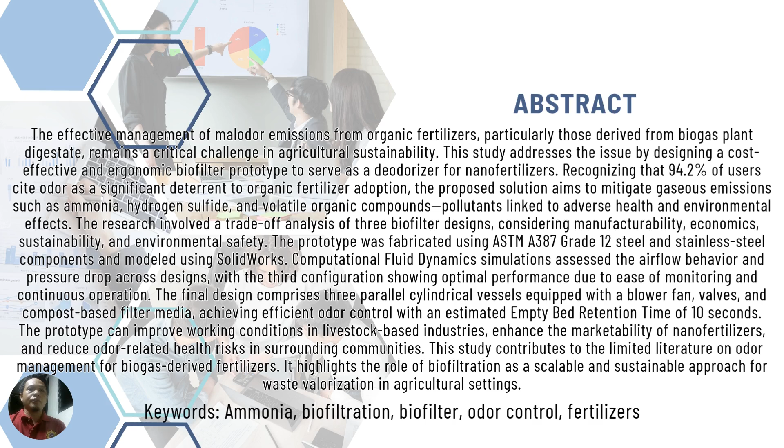With an empty bed retention time of 10 seconds, the system effectively controls odor, improves workplace conditions in livestock industries, and enhances nanofertilizer acceptance. The research advances scalable, sustainable odor control solutions in agricultural waste management.

In the Philippines, converting animal and plant waste into organic fertilizers is a sustainable and affordable agricultural method. However, its widespread adoption is hindered by strong odor, especially in urban or densely populated areas. Studies have shown that odor is the main complaint of users, caused by compounds like ammonia, hydrogen sulfide, and volatile fatty acids, which are released during composting and nanofertilizer production.

Nanofertilizers, especially those made from biogas digestate, emit more odor during mechanical and chemical processes. These emissions not only cause discomfort but also pose environmental and health risks. Solutions such as activated carbon, aeration, microbial additives, and advanced systems like biofilters are being explored. Biofiltration, a cost-effective and low-toxic method, stands out as a biological solution for odor reduction.

Despite its promise, there is limited research, especially on biofiltration for nanofertilizer odors. This study aims to fill that gap by designing and evaluating a full-scale biofilter prototype. It will include computational simulations and trade-off analysis to optimize efficiency, cost, and sustainability. This initiative supports environmental goals, public health, and innovations in agricultural waste management.

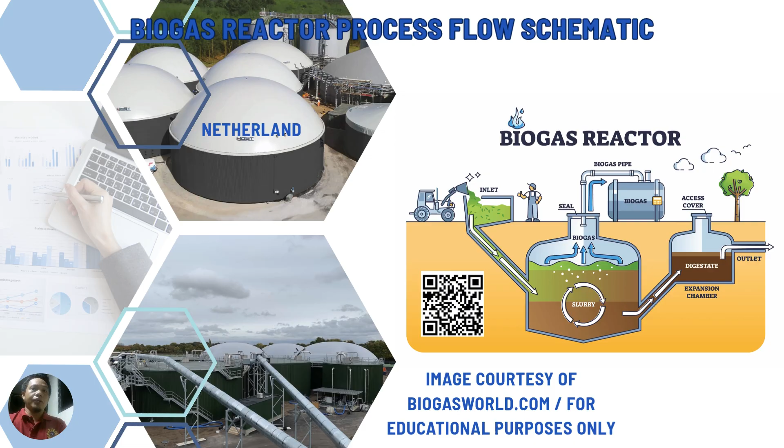The anaerobic digestion process in a biogas digester is a biological treatment method where organic waste materials like livestock manure, food waste, and plant residues are broken down by microorganisms in an oxygen-free environment to produce biogas and digestate.

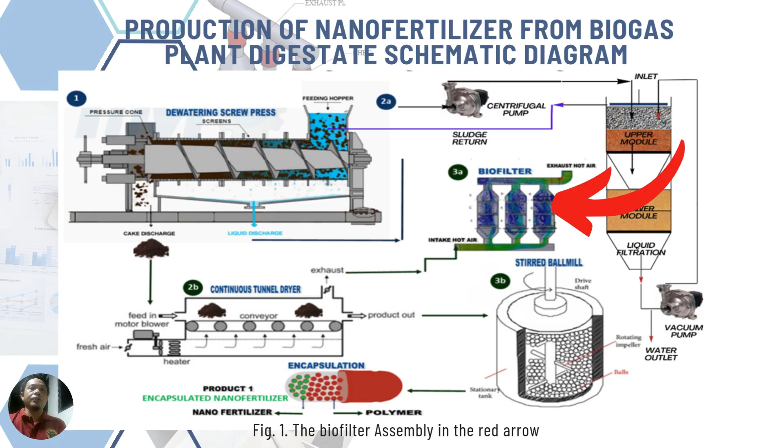In modern waste and water treatment systems, three core technologies play crucial roles in purification and material refinement: the dewatering screw press, the liquid filtration system, and the continuous tunnel dryer. Each of these systems has distinct functions but collectively they support the transformation of organic waste into manageable, reusable, and environmentally safe output.

The development of a biofilter system begins with the utilization of animal manure as the primary input material. This organic waste, often produced in large quantities in agricultural settings, serves as a resource for creating or enhancing the filtration media used in the biofilter.

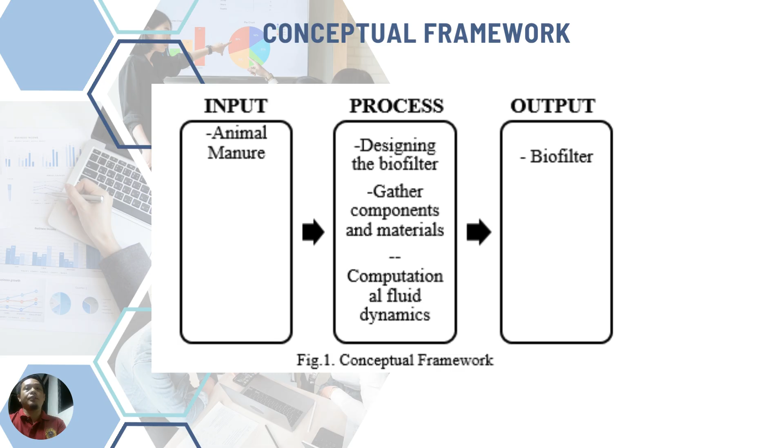This study developed a prototype aimed at reducing odors from animal manure, particularly from biogas digestate. The design features a turbulent airflow with consistent velocity simulation results despite varying pressure. One of its strengths is easy maintenance and monitoring.

Key design aspects include reduced empty bed contact time, leading to the use of smaller media, which increases air velocity but also causes a drop in volume and pressure. The system must maintain a pressure drop below 62 Pascal to ensure proper fan efficiency. Thus, build-up, media settling and material degradation can increase pressure resistance over time.

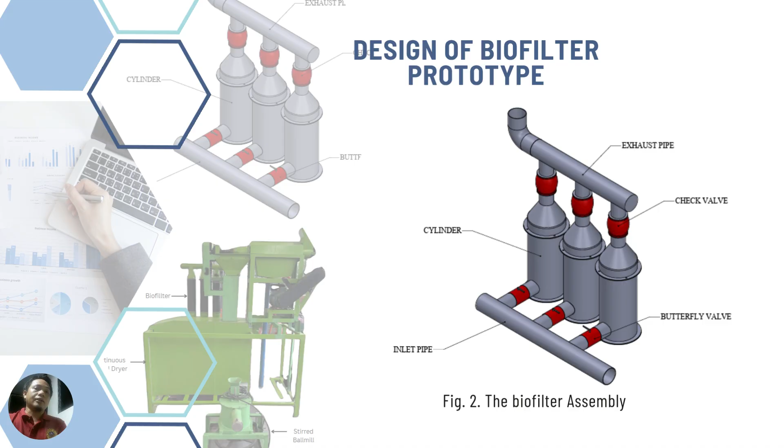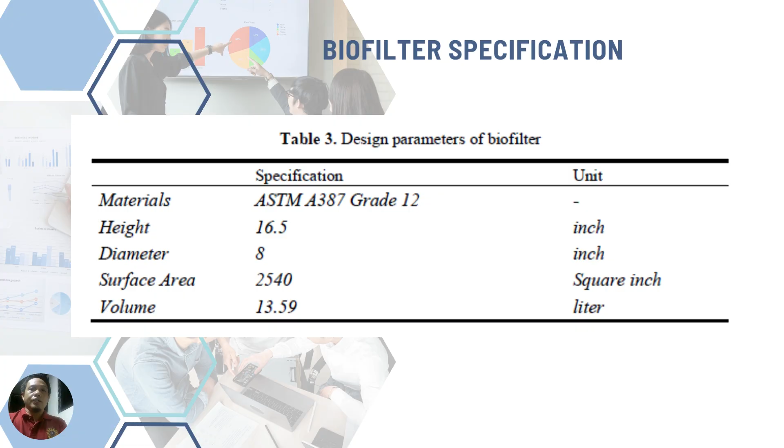Airflow rate assumptions were based on emissions estimates from nanofertilizer processing, with the peak value measured under controlled conditions. The use of three filter cylinders was determined through a volumetric airflow calculation, ensuring sufficient residence time and allowing operational redundancy during maintenance.

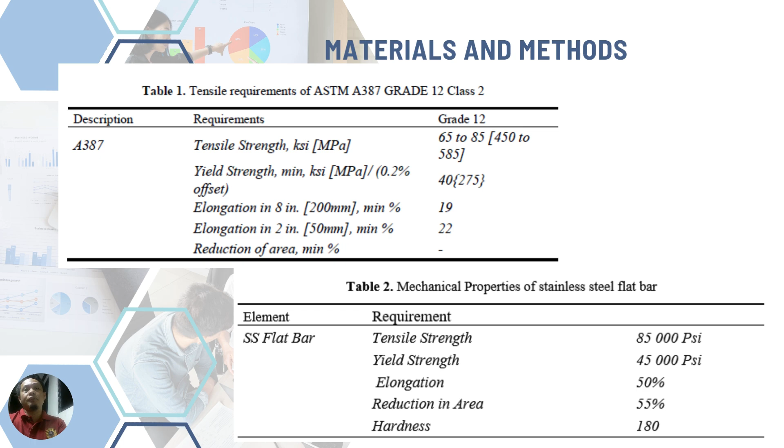Using SolidWorks, several simulations were conducted on the first biofilter design at velocities of 1 meter per second, 2 meters per second, and 3 meters per second. The CFD result displayed laminar flow, with fluid moving smoothly in parallel layers from the intake at the bottom to the outlet. The media inside the biofilter caused the fluid to gradually slow down after entering.

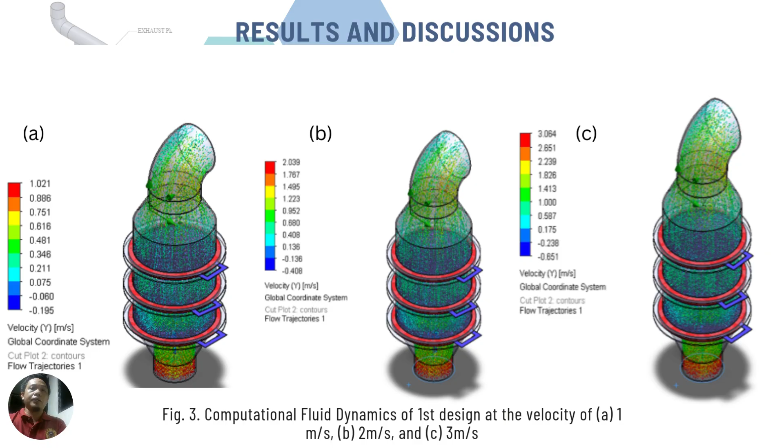However, this design was not selected due to its complex and time-consuming maintenance. Especially monitoring the filter media required removing gaskets, which was impractical for regular use.

The second biofilter design features a side intake, and the simulations show a turbulent flow pattern. As the pressure drop increases, the amount of air moved by the ventilation fans decreases. Upon entering, the fluid velocity drops due to the resistance of the filter media, while pressure builds up at the first media layer. Key factors influencing this pressure drop include media structure, moisture content, gas phase velocity, and bed depth.

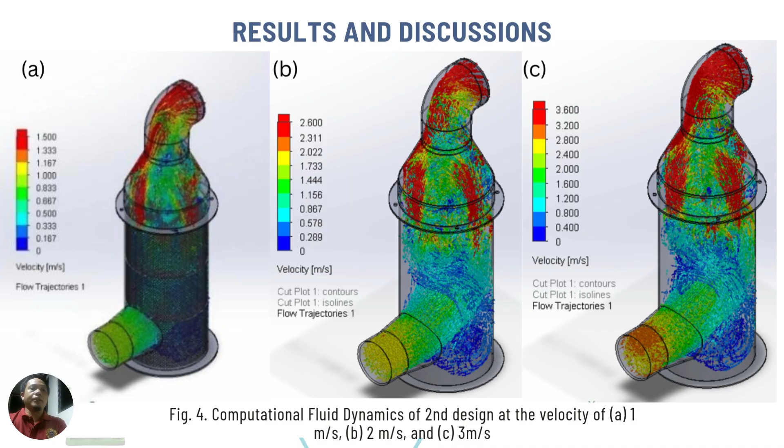The third biofilter design was selected for prototype fabrication due to its balanced performance and practical usability. Simulations at velocities of 1, 2, and 3 meters per second show consistent turbulent flow throughout the structure. Unlike previous designs, this configuration features three vertically aligned cylinders equipped with butterfly and check valves, enabling a more uniform distribution of airflow.

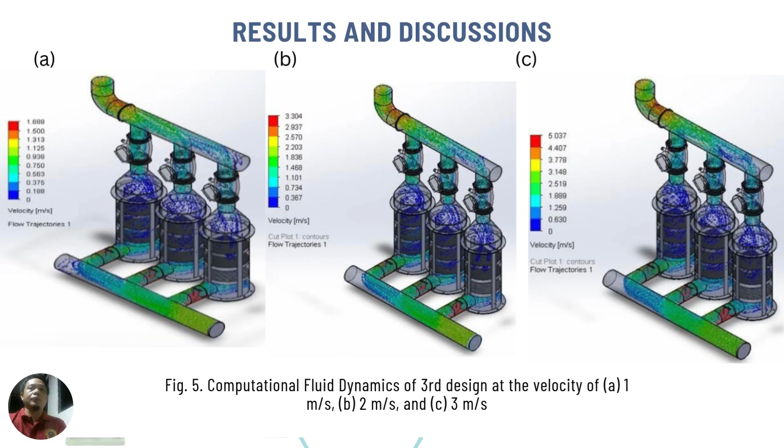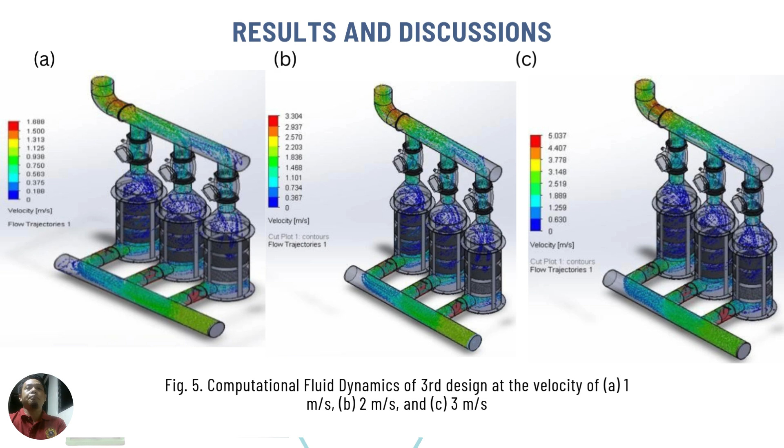One of its key advantages was ease of monitoring and maintenance, allowing real-time inspection without requiring system shutdown or disassembly. The design incorporated a reduced empty bed contact time, which allows for the use of smaller media, while pressure and volume decrease as air passes through the media. The drop was moderate and evenly distributed. This consistency ensured the system operated efficiently within the recommended pressure drop limit of 62 Pascal.

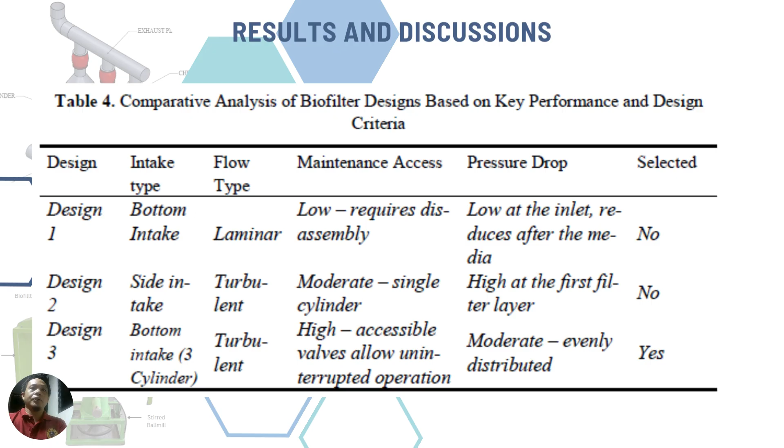Design 3 stood out as the most effective and manageable solution, balancing aerodynamics with operational convenience, and was selected for further testing and evaluation.

Conclusion: this study developed a biofilter prototype to reduce odor emissions from nanofertilizer derived from biogas digestate using CFD simulation, material selection, and trade-off analysis. This prototype, featuring a three-cylinder system with butterfly and check valves, proved most efficient and easy to maintain without interrupting filtration. It ensures uniform airflow, minimal pressure drop, and stable performance.